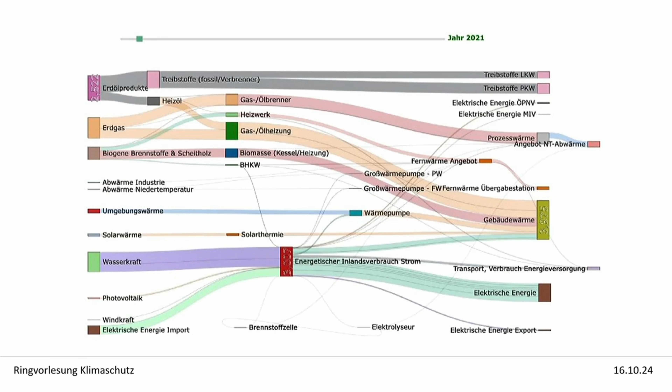So this is the status quo, the starting scenario. We have conducted several modeling processes to see where we could possibly go. I can only show you the final picture here. If we implement all these measures consistently, then we would like to achieve climate neutrality, moving away from gas and oil with an entirely electricity-based mobility sector.

You can see here the building heat is strongly reduced, also in terms of efficiency - this is based on a dedicated strategy. What you can see here is also that the district heating share has increased quite strongly, although the heat demand has actually gone down. We were able to increase district heating from 300 to 1,000 gigawatt hours.

So this is my topic today: district heating. This is not just based on biomass, as it was the case so far, or still is the case in Vorarlberg, but we also have a large share from large-scale heat pumps. And these large heat pumps are largely based on industrial exhaust heat.

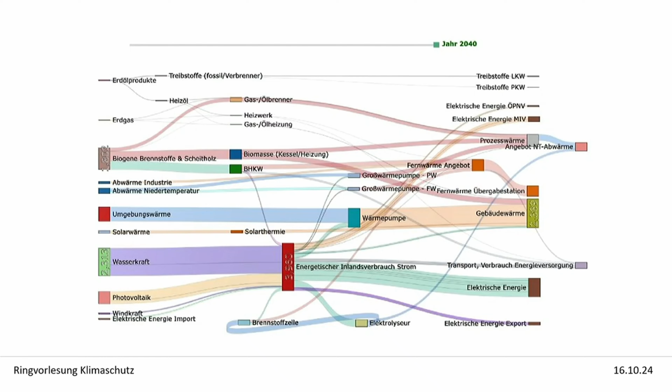I was commissioned with drawing up a study on this topic, and this is what I'm going to be talking about today. What is our status quo in Vorarlberg? We have 13 companies that participated in this study, and they stand for about half of the industrial gas use in Vorarlberg. So what industries are they, and what areas are these companies active in?

We don't have any heavy industry in Vorarlberg, just like Tyrol doesn't. We don't have a steel industry, for example, or a plastics industry. There are no smelting processes that need extraordinarily high temperatures. We have mechanical engineering businesses, and we have quite a large food industry sector.

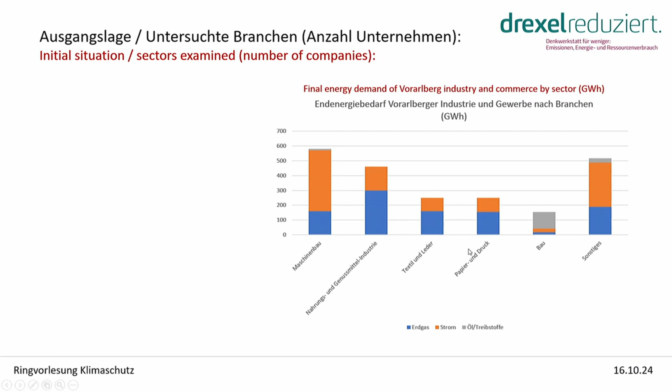Some textiles, a fairly large paper mill, and the rest consists of smaller segments. What we looked at were 5 mechanical engineering companies, so from the largest sector, then 4 players to be precise, from the food industry, 1 textile company, 1 paper industry, and several companies from the remaining segment.

What you can see here is that the final energy consumption for these players varies greatly depending on the industry that they work in. For mechanical engineering, you don't actually need a lot of natural gas because you don't need a lot of process heat. But you do need a lot of electricity in order to keep the pumps and the motors going. For the food industry, the share of natural gas, that is heat, is of course higher because you're baking, you're cooking things, which requires heat.

So we have very different demands here, and we have an inclination to say, well, mechanical engineering, we don't need a lot of heat, so we don't produce a lot of exhaust heat. That is not true, because electrical energy is also converted into heat in the production hall and is available as some sort of exhaust heat.

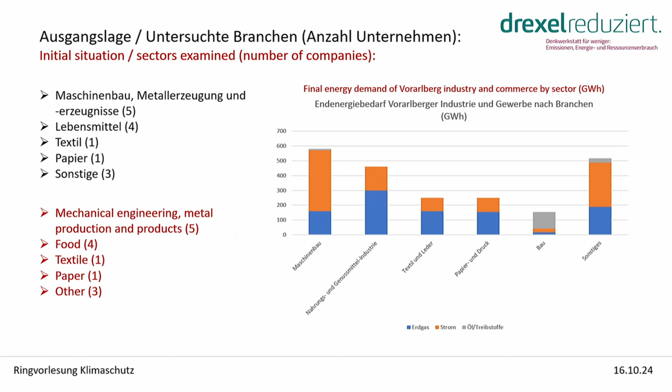For all these businesses, we compiled these sort of energy flow diagrams, just roughly showing the situation, but the idea behind it was to give an overview of the most important key factors.

This is, for example, somebody from the plastics industry, where only electrical energy is used, although the plastics actually have to be melted at temperatures above 100 degrees. This is all done electrically in this particular business. So the electrical energy is used for different production machines, pressurized air, the drying facilities, and so on. And as you can see...

The energy flows here on the right-hand side. You can see what actually leaves the building without being utilized at all. So what actually leaves the building via infiltration or transmission can never be used as exhaust heat. The products that are being heated and that are also transported in a warm condition leave the building in a warm condition. Anything else that leaves up here, we see the potential here for exhaust heat. So these are energy flows that leave the building, for example, the exhaust heat from the cooling facilities.

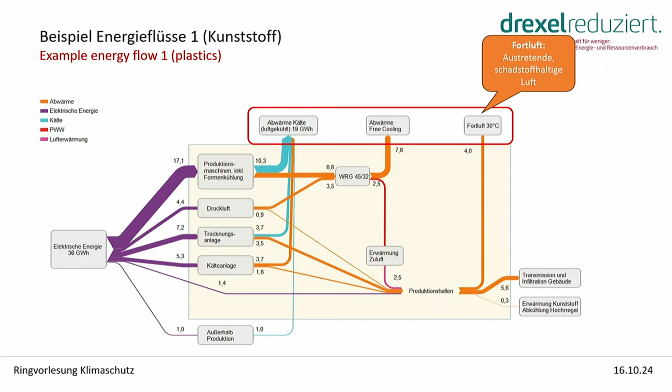Exhaust air is what we call it. You could also call it outgoing air. The outgoing air is also the air that leaves the building, and the exhaust air is the air that is being suctioned out of the building.

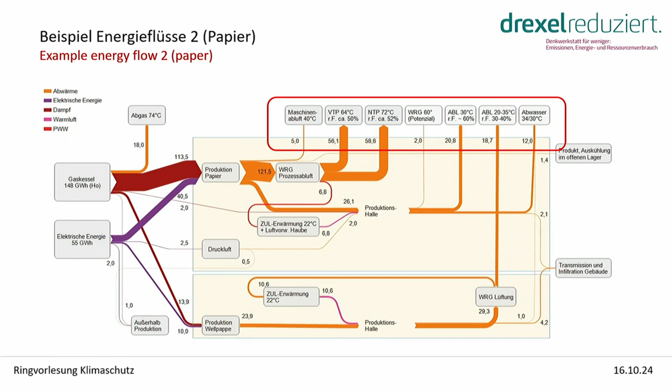What we see here is the paper industry. So you can see the heat flows are quite strong here, 20, 30, 60, 70 degrees. These are all heat flows that are part of a heat network that works with 80, 90 degrees, and that are not being utilized directly. However, they are strong energy flows with several hundred gigawatt hours per year. This has an enormous potential, and this energy can only be leveraged by using heat pumps, and this is what I'm going to be talking about in a minute.

Another example, this is from the packaging industry. You can see lots of heat flows here, exhaust heat flows, and you can see quite well that the flows that can be utilized directly, so anything above 80 degrees, that would be flue gas, for instance, with up to 240 degrees from a post-combustion facility that is being used in a heat network already at this point. Everything else, unfortunately, is going to waste and is not being utilized.

But what you can see is that the heat flows make up several gigawatt hours. In total, we have 10 here that are not being utilized, but that could be utilized in a way that makes sense for the business. So the ratio is about 1 to 10 between heat that can be used directly and heat that can be used indirectly. And that is really the decisive factor in the question of how much exhaust heat exactly do we have available. With these temperatures that cannot be utilized directly, we're talking about anergetic flows. So this is energy that cannot be utilized directly, but needs some sort of temperature lift.

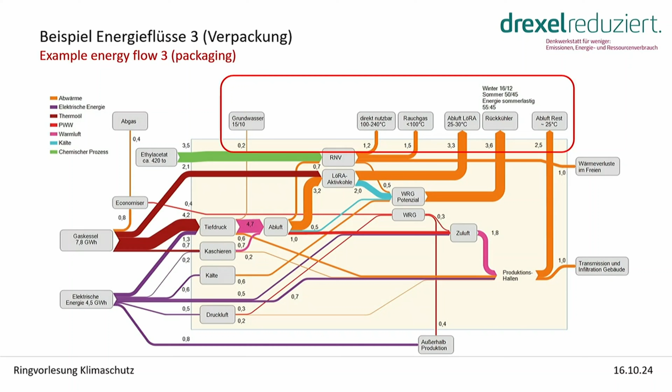What did we find out about these sources of exhaust heat? For all the businesses that we looked at, we found out that the largest amount, more than 160 gigawatt hours, is available as exhaust air from the production processes, from fryers all the way to paper mills to printing presses. So this refers to air that leaves the building, contains emissions, but also a lot of heat.

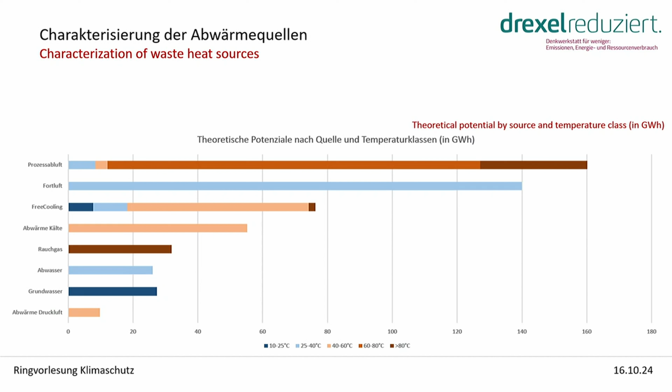The colors of the individual categories show us the temperature ranges. You can see right at the bottom, we have dark blue, 10 to 25 degrees, brown, larger than 80 degrees.

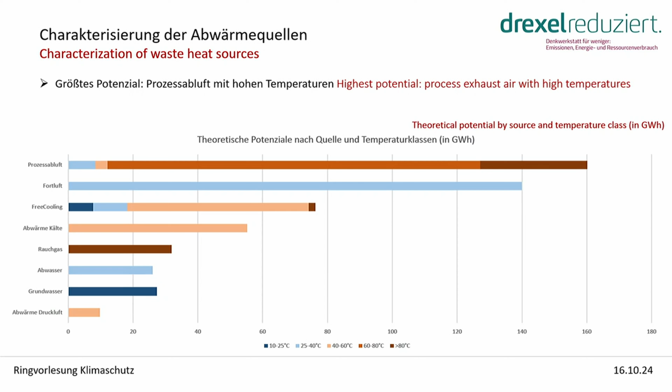The exhaust air has the highest potential, but so has the outgoing air. However, it is more difficult to access it. You need quite a lot of quantities in order to have an economic process, because the effort that goes into it is relatively high. I'm going to come back to this later on.

When is this heat created? Is it constant throughout the year, or is it something that is being created mostly in the summer when you need less heat? We have these two flows. We have the outgoing air, which is stronger in summer than in winter, because in winter, heat recovery actually cools down this particular airflow.

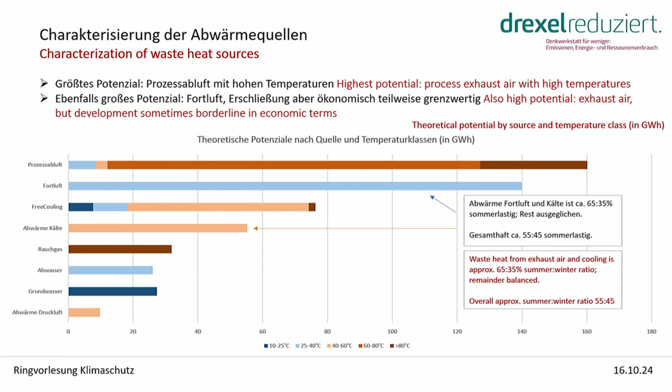And we have the outgoing air from cooling facilities, which are also utilized more in the summer because the outside temperatures are higher. So with these two flows, we have about 2/3 in the summer, 1/3 in the winter. For all the other ones, it is relatively balanced, so that really across all the heat flows, you can see a summer emphasis of about 55%, so this is not really a dramatic value. The relevant heat is there in the winter months as well.

The same here evaluated by temperature. What do we have available with more than 80 degrees? This would be the brown area here, 60 to 80 degrees. And you can also see the biggest area is 25 to 40 degrees. This is a temperature that can be utilized very well by heat pumps.

Here at the bottom area, 10 to 25 degrees. This is when it becomes more difficult to use this heat in a way that is economically feasible. However, some people do, because they say, well, I'm glad to get rid of this heat. I'm glad to sell it to someone.

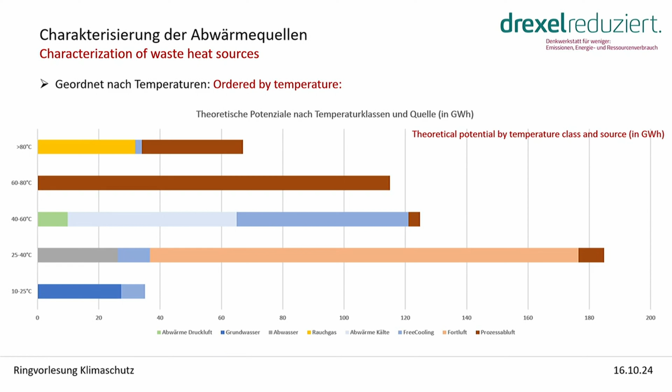For example, some businesses cool with groundwater, but they're not allowed to heat it to more than 20 degrees. And if they have more heat that is being generated, they have no capacity to do so. So it might be useful then to get rid of this heat and feed it into the heat network. But usually we're talking about 25 degrees plus. This is really the range where it becomes economically interesting.

How much do these companies work? What do they actually do? How many hours in a year is this exhaust heat available? This is important to know for operators. So these are all the companies that we looked at. Some of them work more than 8,000 hours a year. On average, it is 7,250 hours. So that means an availability over the year of more than 80%.

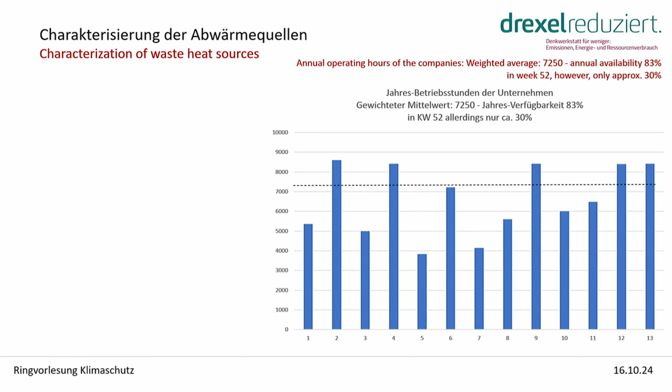So the heat really is available pretty much all the time. Only during Christmas week we can see that most businesses have actually, that most people actually close down for that particular week, and then the performance goes down to 30%. So we have to be prepared for that if we work with exhaust air, that there might be some additional backup required during Christmas week.

This brings us to our next point. How do we use this heat? How high is the share of the heat that can be utilized? We have two possibilities to start with. Let me actually explain the diagram first.

What we see here is a typical heat demand in a heat network. Highest demand during the winter months, January, February, March. Then in summer, we only really need hot water, some commercial process heat, and then the demand goes up again. This is the classic heat demand over the year. What I said earlier, this summer peak that we see of about 55%, this is reflected here in the curve. We have a little more exhaust heat available in the summer than during the winter.

So we try to use as much exhaust heat as possible. If we use 100% of this exhaust heat, then the purple curve would have to be here, and the share would actually be quite low if we say we want to use as much exhaust heat as possible within the network with a few peaks, and we would move it down here, then this area that is not being utilized would be enormous. So you have to really find a balance between those two extremes, and this is what we try to do.

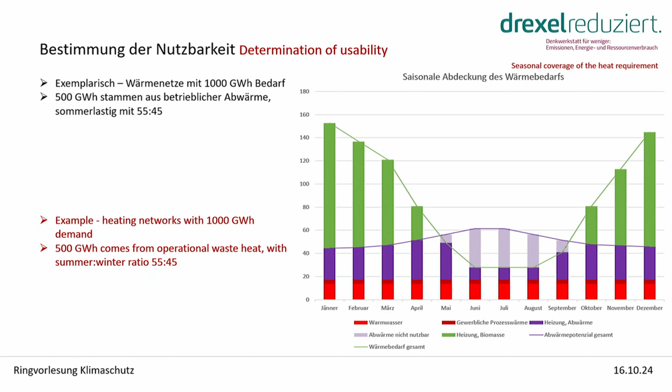We try to apply this to all the heat networks in Vorarlberg. We have about 1,000 gigawatt hours in demand, and about 500 gigawatt hours are covered by exhaust heat from businesses. The rest is covered by biomass and biogas. In this scenario, up to 80% of exhaust heat can be utilized, and we think this is a great balance—50-50 with biomass or another biogenic energy carrier, and only 20% of the exhaust heat actually goes to waste.

At this point, we could also think about seasonal storage. If you want to increase your exhaust heat level, you can increase the purple share, and try to move this excess heat from summer into the winter months. This would be seasonal storage.

Unfortunately, this is still fairly expensive. We're talking about storage costs of about 10 cents per kilowatt hour with these gigaTES that we perform, these gigathermal energy storage tests. So it is not really worth it from today's perspective with today's prices to do this. But we think this is going to be a relevant topic, and it would be advantageous if these fluctuations between the summer and winter months weren't so big.

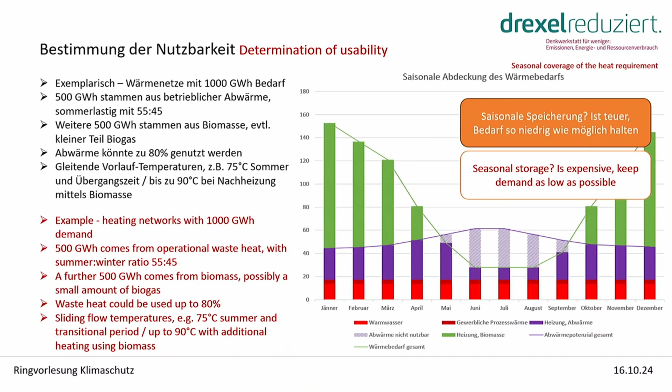The central technology for utilizing these energy flows, which most of the exhaust heat consists of, are heat pumps. For the non-engineers among you, how does a heat pump work? I'm going to explain it quickly. We have a heat source from which we get the heat, a bit like a fridge where the inside is cold, but it actually releases heat into the environment.

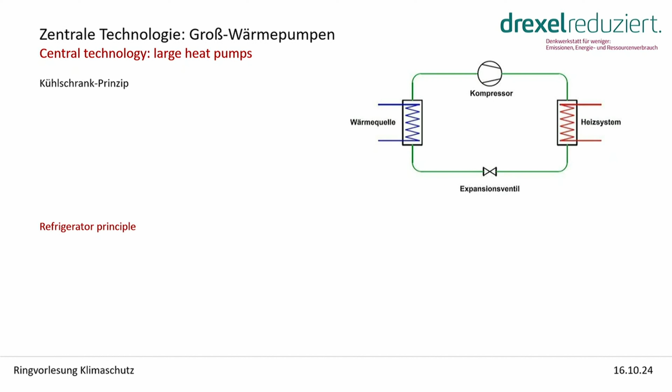We have a compressor, and a cooling agent is introduced into this cycle at a very low pressure. It is vaporized, which means it draws out temperature from the environment, then is compressed within the compressor to quite a high temperature level in order to release the heat that has been produced on this level by liquefying, condensating this cooling agent, and forcing it to release the heat.

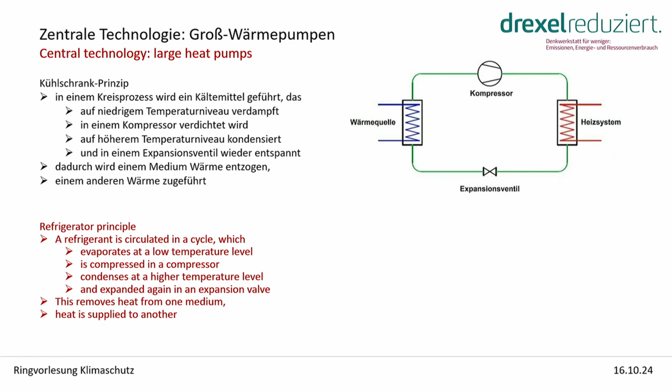So the heat is drawn out of the colder medium and fed into a warmer medium. The extent of the efficiency for such a heat pump is called the coefficient of performance, the famous COP. The closer these two temperatures are between the cool and the warm level, the more efficient the facility is—so the higher the COP is going to be.

The COP describes the amount of energy, the amount of heat that I get out for the electricity that I put in. So let's say we have 300 gigawatt hours as a goal, and we feed 100 gigawatt hours into the facility—we have a COP of 3. This actually constitutes the economic limit. I don't think you should go much lower than that. The higher the COP, the better.

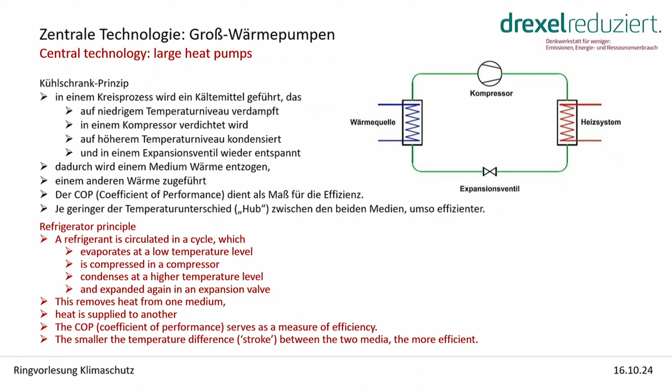So this has a lot to do with temperatures, how efficient these pumps are. This is why I already said if we use exhaust heat at a low level, at 20 degrees, and use it for 80 or 90 degree heat production, it will be very difficult to do this in a way that is economically feasible, because the energy stroke is so high and the efficiency is quite low.

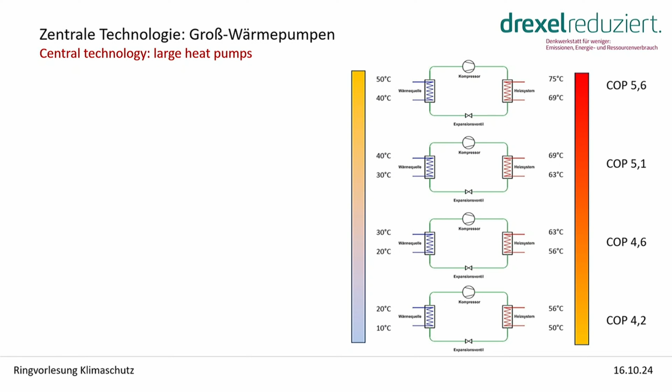What can we do about that? The central element, if we have large energy strokes, is a cascading of these heat pumps. So we have a heat source with, let's say, 50 degrees. We cool it down to 10 degrees, but not in a single step, to help it evaporate.

On the other hand, we have the heat medium, which we're also not going to push up in a single step to the temperature that is required, because otherwise the temperature gap would be high. We actually have 4 steps here. We cool down from 50 to 40, we have the vaporizer at 35, and so on. We sort of do it in steps, in this cascade.

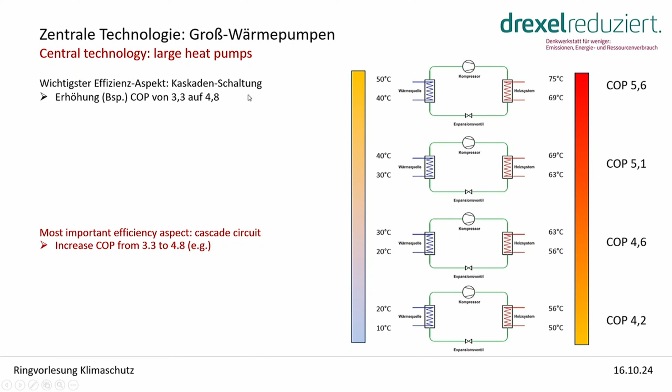So overall, we have the individual COPs here, and we have a COP of 4.8, which is actually economically very feasible. So whenever we have medium to high exhaust heat temperatures that we have to cool down, for example process air, we might consider this sort of cascading approach.

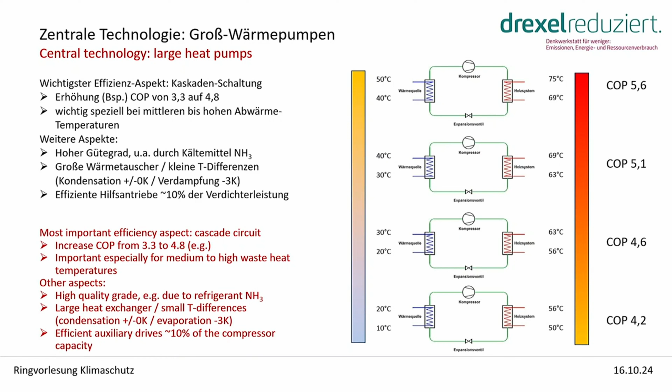What else is important for utilizing large heat pumps? We have the quality degree for heat pumps, which describes how much we actually get out of the pump. For small heat pumps used in households, this would be 50%. For large-scale pumps, the value might be as high as 60 to 70%, the quality value. This is achieved by efficient cooling agents, ammonia for instance, or particularly efficient auxiliary systems.

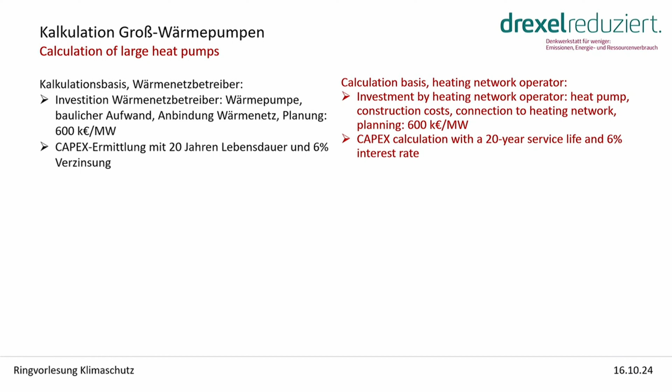To tell the industrial players what they could get for their exhaust heat in gigawatt hours, we have to take into account the investment costs, the annuities for the large heat pumps. So we need a few basic calculations, and we prepared this assuming an investment of about 600,000 per megawatt, a lifespan of about 20 years, and an interest rate of 6%.

From the point of view of the heat network operator, it's important to know what the initial costs, the initial outlay, are going to be, so he can then go on to pay the industrial players for their exhaust heat. We also need an amount for maintenance and repair work.

Depending on the size of the facility, we also need to know what the electricity price is going to be, and how much it's going to cost to operate the heat pump, to find out what we can actually charge for the heat.

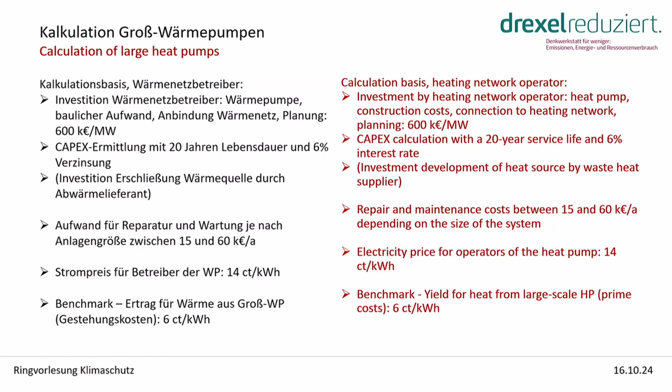Our benchmark is what biomass costs today, approximately. For example, wood chips - if you can pay what biomass heating costs, we have a benchmark of about 6 cents until it's paid off. This is a good benchmark for industrial players. If this is within their range, then they should feed it into the heat network, because that makes economic sense.

So these are all the basics. If we combine them all together, the results are as follows. We have temperatures of 15 to 30 degrees - this is usually groundwater used for cooling purposes, which is heated and then also refed. We have some free cooling and other cooling facilities, and we have a COP between 3 and 4.

This energy is sometimes not worth much, but companies are still glad to be rid of it and can even sell it for about a cent per kilowatt hour. That's not a lot. We continue with temperatures of 30 to 50 degrees, which come from cooling, from process exhaust air, where we have a COP of more than 5. So you can see that here the resale price is a lot higher.

For higher temperatures that are used by heat pumps, we have values of up to 3 cents, and any value that is used directly without a heat pump, we have a price of about 3 to 5 cents that you can charge.

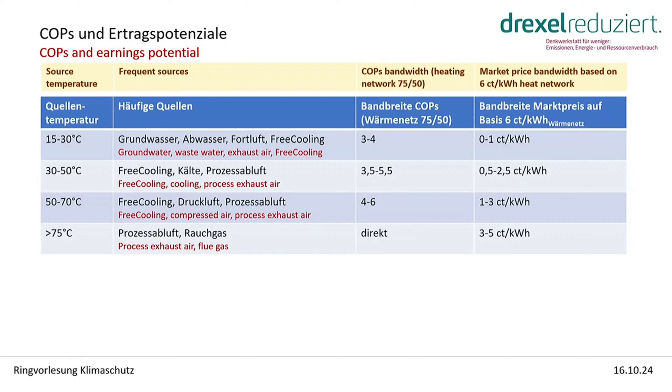Why is that important? Well, because businesses have to be able to get their figures in order. They have to work out whether the investment is worth it for them, because obviously it's going to cost money to open up these heat sources. What is the risk associated with this? What is the long-term financial outlay? It's important to be able to tell them that.

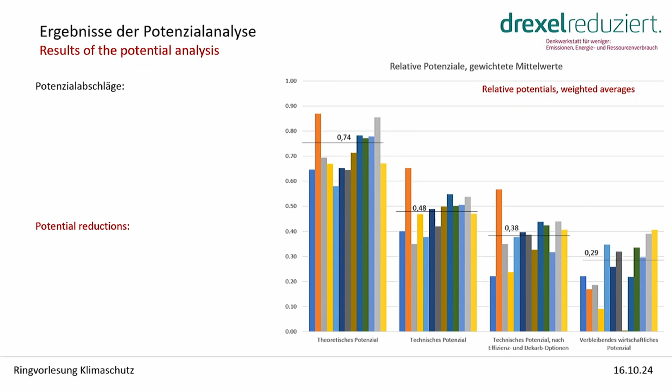Another result - what actually is the potential? How large is it for the companies that we looked at in relation to their final energy consumption? So we look at how much energy goes into this building, for example in the form of natural gas but also electricity, and how much of this can be utilized.

Then we look at what cannot be used technologically - for example, sludged sewage that just isn't going to exhaust water, that just isn't going to work because the facility would clog up all the time, or the heat in the summer that cannot be utilized. So we deduct 20% for these sort of seasonal fluctuations, and we have a technical potential of about 48%.

Next, and I'll come back to this later, what exhaust heat potentials should the company itself use? Rainer said I should actually start with this, but I've moved my presentation around a little. Of course, this should actually be the first question - what efficiencies could this use of exhaust heat open up for the company itself? Is there something that could be used especially for decarbonization, for reducing the CO2 footprint of the individual businesses?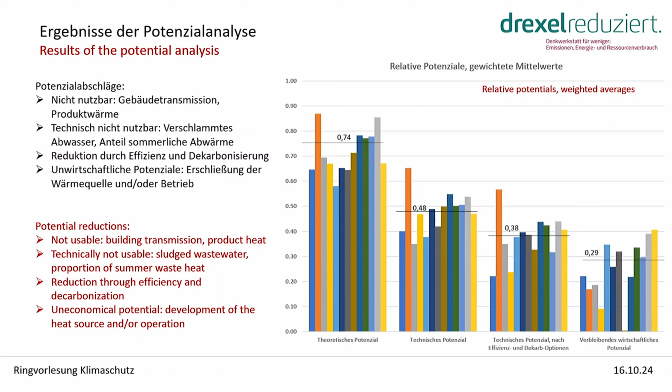So we are now down to 29% on average. For one single business, we had nothing at all remaining, but for most of them there was something that could be used. 29% on average, after we removed all the potentials that would not make sense, because they would result in a heat price of more than 6 cents. So we still have this 29%.

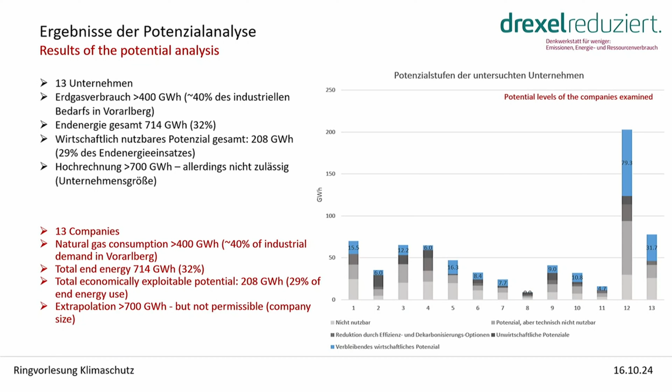If we extrapolate this, 700 gigawatt hours, then we have more than that can actually be utilized. We cannot do this for one reason: there are some very large companies here that we analyzed, and for them the 29% usability applies, but the smaller the businesses, the harder it becomes to use this exhaust heat on a feasible basis.

So here we have a remaining value of 15% for the remainder, and this value of 437 gigawatt hours as available potential for exhaust heat.

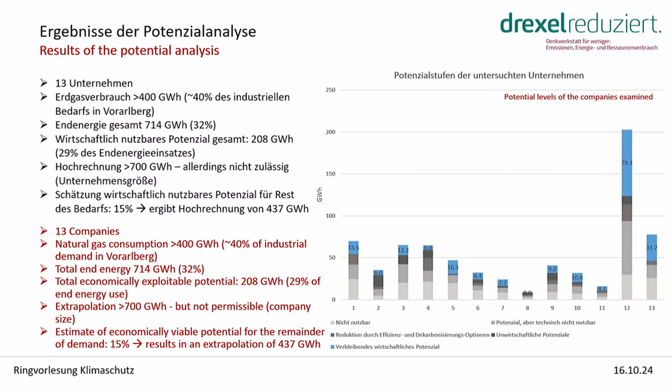If you look at this number again from the energy flow diagram, we have an overall heat demand of 4,000 gigawatt hours in Vorarlberg at the moment, and we're going to push this down to 3,000 over the next 15 years or so with refurbishment measures and so on. So these are more than 15% that we can provide with exhaust heat.

What is important for utilizing this heat? What do we need to bear in mind in order to bring these two players together, industrial players and heat network operators? For the companies, there is a readiness to invest, a readiness to develop the potential that is there. We notice this again and again.

Usually the interest in investing in a heat pump is quite low. They think this is something that the heat network operator should do, but they're happy to provide area, to provide space. This is important because otherwise the whole project is doomed. So there is a readiness to cooperate.

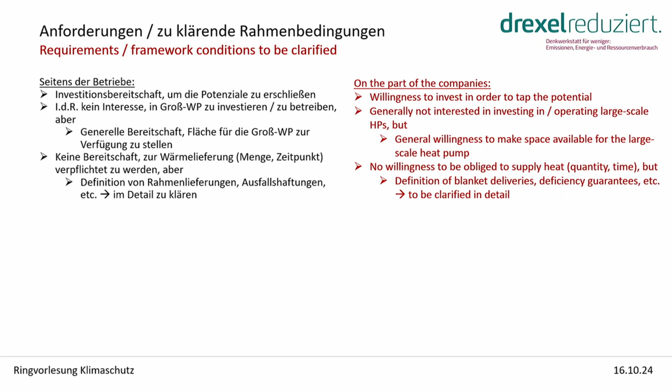What they do not want to do is to be obliged to deliver heat. This is always something that is difficult for industrial players, but they are ready to define some framework conditions, some liability regulations for when they cannot deliver, and so on. We actually have negotiations at the moment between at least one of these companies and the heat network operators, so it is taking shape.

What do the network operators need to take into account? They have to bear in mind that there are redundancies. For example, if we have the Christmas period where the heat supply goes down, we need multimodal networks in order to ensure this redundancy using different heat sources.

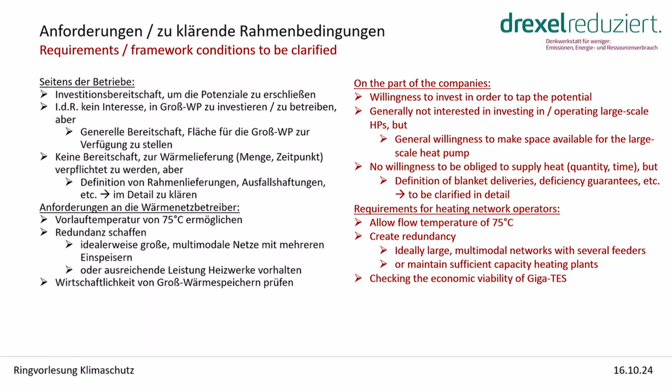Also, several companies could be connected into larger heat networks and could then integrate biomass plants where necessary in the system. Large heat storage facilities, this is quite a difficult area at the moment, but it is something that we should bear in mind, I think.

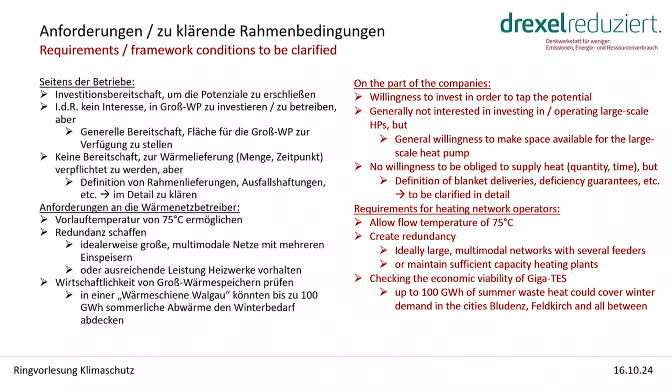What we looked at was the Wärmeschiene Walgau. This is the area between Bludenz and Feldkirch in Vorarlberg, where 3/4 of the industrial exhaust heat in Vorarlberg actually originates from. This is quite a small area, but 75% of the industrial exhaust heat in Vorarlberg is actually produced there. So it would be a great idea to try to cover this particular stretch and maybe think about seasonal heat storage for this particular region.

We conducted the study in cooperation with the Vorarlberg University of Applied Sciences. Their part was to find other regions in Europe with similar starting conditions and to look at studies that adopted a top-down approach, based on a certain number of population or company turnovers or GDP, working with certain key economic indicators to see how much exhaust heat is actually being produced.

They focus on the following studies. There is a comparable European region with a similar industrial structure and quite a large number here, 300 to 800 gigawatt hours of exhaust heat.

There is also a pan-European study that looks at the whole of Europe with 285 gigawatt hours, but a reference of 25. So the entire exhaust is cooled down to 25 degrees, whereas we cool down all the way to 10.

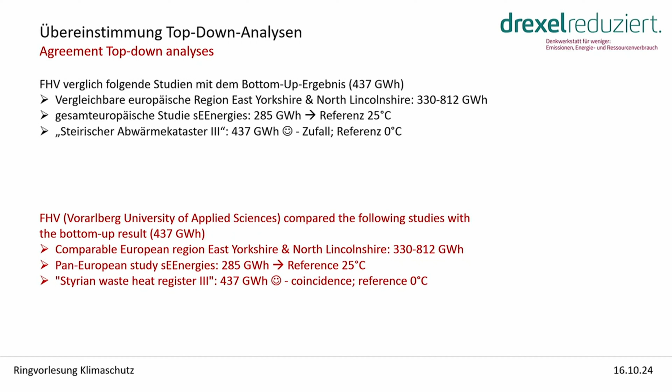In Styria, there is also a study that actually resulted in the same 437 gigawatt hours, which is a complete coincidence because they had a different reference point, which was 0 degrees, not 10 degrees. But it still shows us that we are moving within the correct numerical parameters. So these top-down studies actually fit in quite well with what we arrived at.

So we're moving away from the use of exhaust heat by external players and try to make sure that it is used by the company.

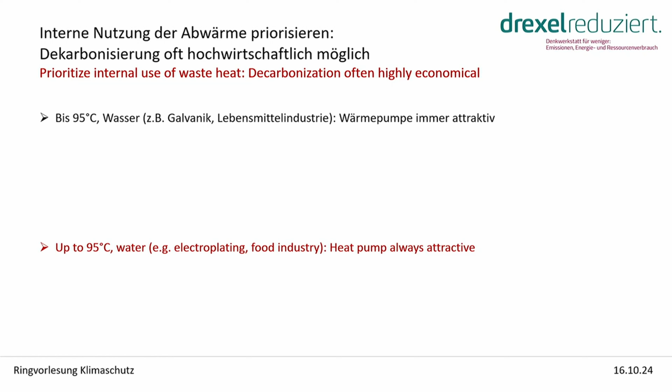Process heat comes in several different temperatures. Quite a lot of industries work with temperatures less than 100 degrees, for example the metal processing industry, also the food industry. People frequently work with lower temperatures. And this is where heat pumps are always attractive and always make economic sense. It makes sense to replace gas by a heat pump.

By now, we have also seen a development in heat pump technologies, so heat pumps that work with low pressure steam up to 140 degrees are at a technological level of 9. So these are really serial products that are ready to use, and they deliver low pressure steam.

This is something that is particularly relevant for the food industry, but also for the chemical industry, for drying processes, for paper production. This is where heat pumps are readily available, and we have to make sure that we have a relevant exhaust heat level.

But the higher the temperatures that are needed, the higher the exhaust heat temperature is going to be. So in many cases, this actually works really well. Up to 200 degrees, we have a good perspective for high-level heat pumps. I would not use one personally at this point in time, even though they are available at the market. But I think for the future, this is the way to go.

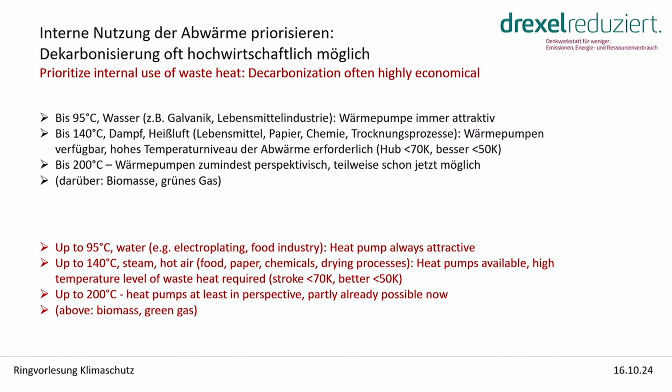For temperatures above that, we're going to need something that burns biomass, for example, or gas for melting processes or other proper high-temperature applications. This is a case example also from the industry in Vorarlberg, a production facility

requiring about 80 degrees as its process heat temperature. And we can see here the exhaust heat that is available, anything between 15 and 40 degrees. In the summer, a little more in terms of temperature. All this is available. And looking at these heat flows, we have 29, 30, 40 gigawatt hours that are available

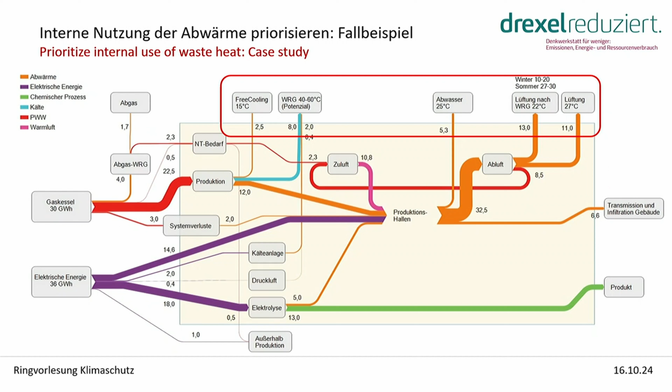as exhaust heat, and 30 are being consumed. Required are slightly more than 22 gigawatt hours. So we have a lot more exhaust heat available than we would actually need for production. We can pick out the most economical flows, and these are the ones with the highest temperatures.

This is what we did for this particular company, and we looked at 3 heat sources in particular. The blue area here refers to cool temperatures, so anything that refers to heat being drawn out from the production processes. Then we have wastewater leaving the company in large quantities with up to 30 degrees, and here we have the

outgoing air. This is 200,000 cubic meters per hour that are used here in order for ventilation. And we only used a small part of this. It is quite clear that we have a lower number available in the summer, but it is still the largest energy flow even in January.

This is really what we're taking out of the exhaust air after it has already been through the heat recovery process. So we are not going towards 70-80% here. Usually we're staying below 50%, sometimes up to 60% if we're in a particularly fortuitous scenario.

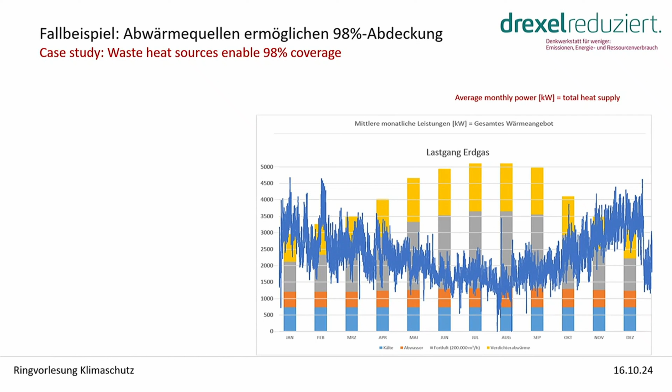If we use this and we compare it to natural gas use, which is also higher in winter than in the summer, we can see on average that we are able to cover the requirements even in January.

Here a peak load coverage of about 2% is required on top, not a lot. So this would be a step towards CO2 reduction for this company, full decarbonization really.

We could also deliver up to 15 gigawatt hours into a heat network. This would be particularly good in the summer. We have a basic load here that is actually very good.

We are currently negotiating with a heat network operator, and it looks as if we are going to be able to come up with a solution where the peak load coverage is not going to be covered by gas, but by the network operator, because we don't actually need more than 80 degrees. So they might deliver 1 gigawatt hour from biomass in winter and receive 3 gigawatt hours of exhaust heat in the summer. What exactly the ratio is going to be is not determined as yet.

We're going to find out over the next few weeks. Like I said, negotiations are ongoing, but it looks as if we're going to be able to leave out the natural gas share completely here. We're going to be able to cover even the peak loads with biomass, and we're also going to save a lot of energy because of this heat recovery. So this, for me, would be a great example for decarbonization, and still feed some exhaust heat into the network.

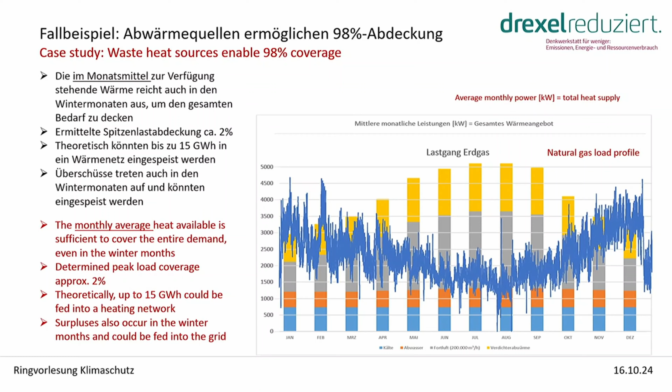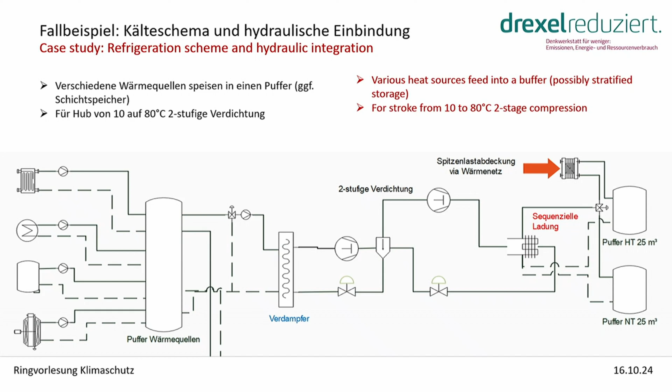If you need only 80 degrees, it would be more difficult to stay economically feasible. We still have about 25% of the overall demand, which is low temperature exhaust air, which makes the whole thing a lot more interesting. And this is also something that we have to be aware of.

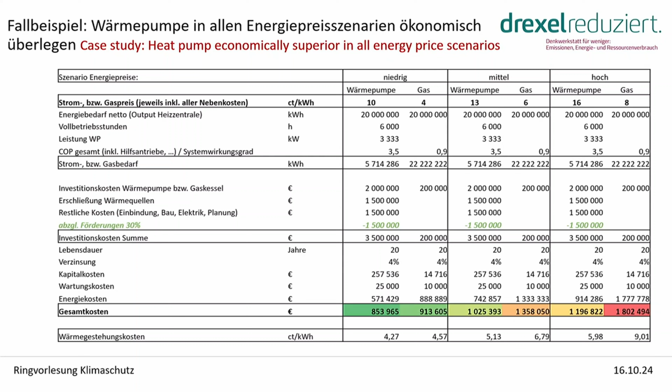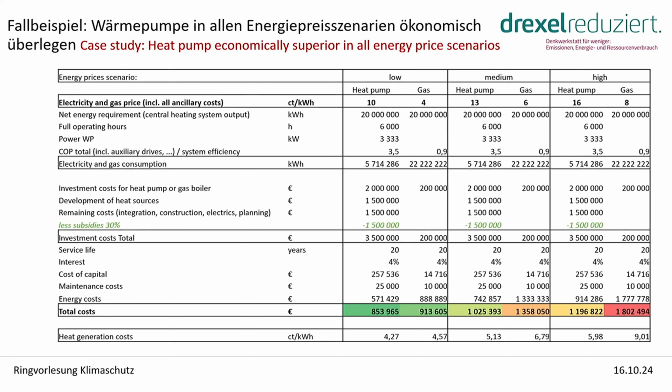Of course, industrial players know where the CO2 tax could possibly go in future, and they are trying to take this into account. They say, well, we have to be aware of the fact that gas might be costing 6 or 8 cents at some point in the future, and then electricity prices are going to go up. But if this is something that we can take into account in the individual scenarios, this economic feasibility, I think it is something that increases trust on the part of the client, and it shows them that we're being transparent and honest. So this is what we are trying to do at the moment with this first one of the Vorarlberg top 10 users of the Vorarlberg industrial players, and we really hope that this is going to be implemented.

How is this study transferable to other regions, especially given the fact that Vorarlberg is not a heavy industry region? We are industrialized, but we don't have heavy industry that needs a lot of raw materials and a lot of energy.

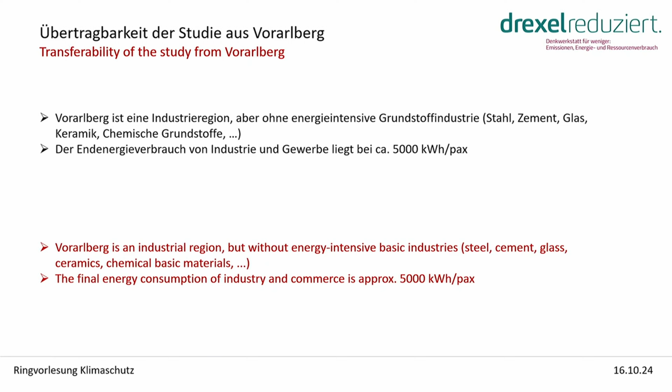We have about 5,000 kilowatt hours per person per year. This is comparable to Switzerland, not comparable to the rest of Austria, and not comparable to the European average. It might, however, be twice as much depending on the region.

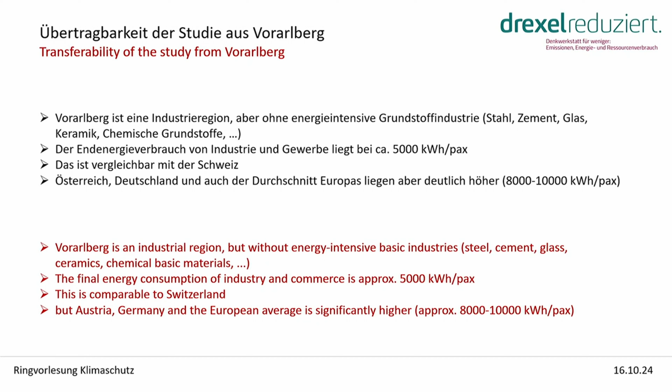So with this exhaust heat potential, you could actually enter into political discussions also in other regions, because it is very likely that energy usage in other regions is larger.